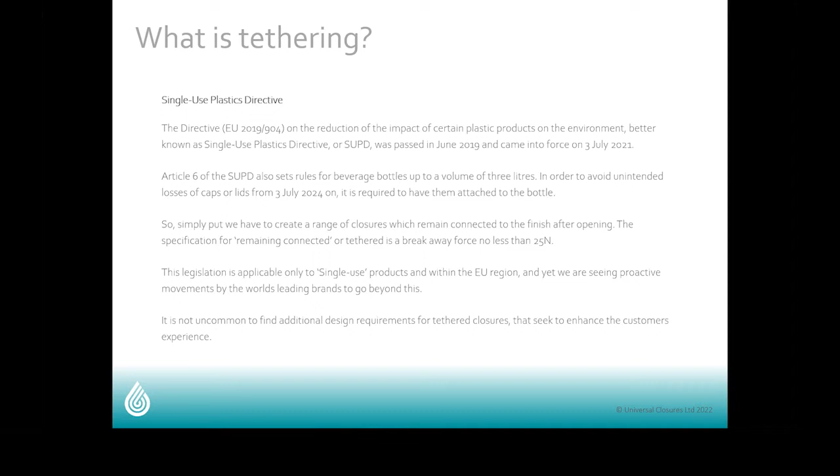I mentioned finishes then. So that's the bottle, that's the actual neck part of the bottle that the closure attaches to. You may have heard a lot of talk about 3040 or GME 3040. It's the classification of that particular finish.

Now, the standard for 28mm neck finish at the moment is 1881. That's the most common finish for CSD water, but of course there are others. It is intended that 3040 be a replacement for 1881.

There are shorter neck finishes in the market already, specifically in the form of GME 3037. But testing done at Coca-Cola showed that this particular finish struggled with some of the more extreme performance requirements, specifically carbonation retention and opening performance. So Coca-Cola set about with a group of suppliers, namely closure and finish suppliers within the industry, to create a finish which could meet the additional requirements needed.

In addition, there was a requirement to create tethered space. So GME 3040 could have indeed been made lighter still, and in fact there is a finish known as GME 3041, which is lighter than 3040, but it doesn't contain the necessary space to bring about tethering.

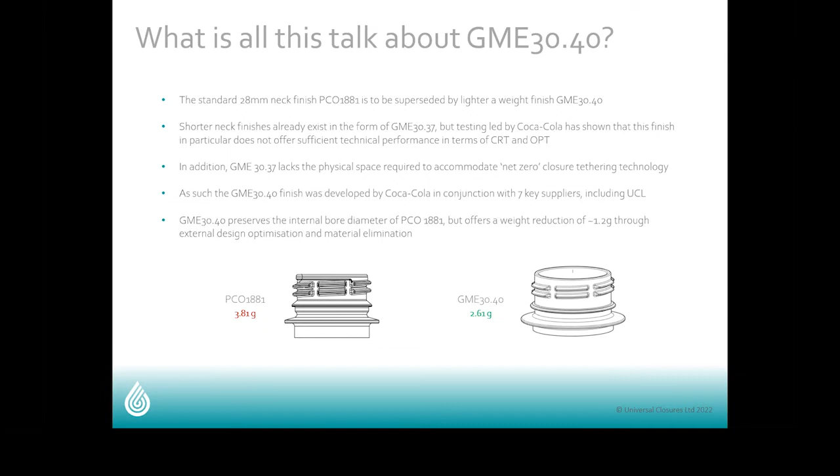So, can all closures and finishes be tethered? Well, in essence, yes, the answer is they can. The aim when tethering a closure should be to achieve a net zero impact on characteristics such as weight, capping application, manufacture, tool design, and customer interaction. So net zero, I mean, we don't want to create a situation that's worse than what we're currently in by loading up a closure with a tethering system that's got enormous weight to it.

GME 3040 is created so that there's enough vertical space to incorporate tethering technology within the parameters of the actual closure itself without going external to the actual closure geometry. There are other finishes like GME 3041 or 2925 or 3037, which don't contain sufficient height within their finish to incorporate that tethering technology. So it is possible in those situations to tether those caps by creating external geometry.

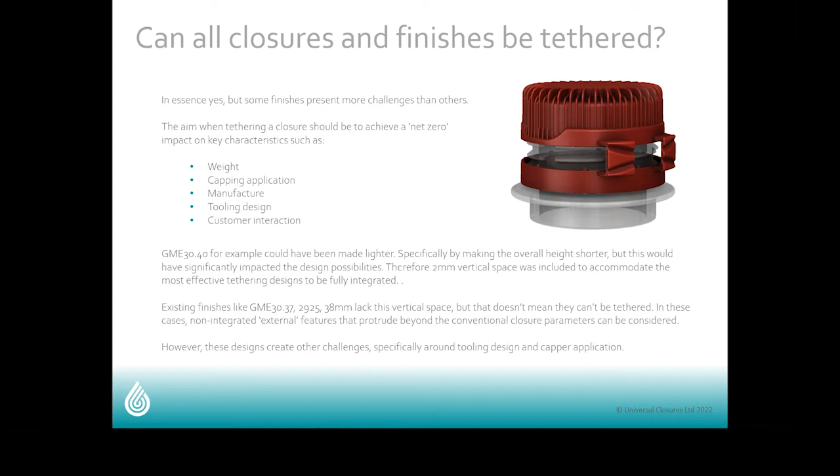And so that brings us on to a 3040 design that UCL Universal Closures have created. We have many tethering designs and solutions for many different finishes and closures at UCL. I won't go through them all today - I just want to show you two very different ones.

It was agreed by the group of consultants for Coca-Cola that 2 millimeters was the required vertical space necessary to give everybody an opportunity to incorporate robust tethering technology. Coca-Cola set additional requirements beyond the mandatory ones, covering clearance to the finish opening where the consumer drinks from, repeatable and intuitive opening, and an opening holdback—so when the closure is opened, it remains there, intuitive across many different closure manufacturers and suppliers, but remaining familiar.

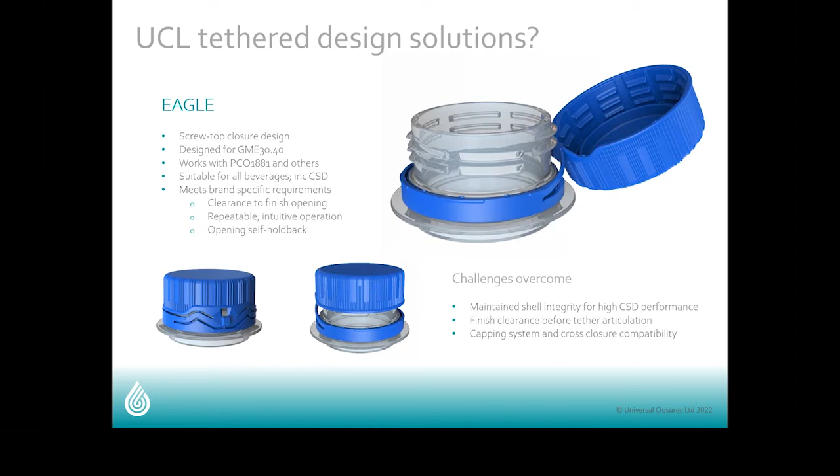A very different approach to tethering is to incorporate a live hinge within the closure. UCL have a design we call hinge molded closed, or HMC for short. This is a simple flip-top closure design. It doesn't work for CSD products because it can't vent the carbonation, but it works really well on short neck finishes like 2925, where non-carbonated beverages such as water and dairy are present. The UCL hinge provides a natural tether, connecting the lower part to the upper part. It has built-in tensions within the design that give it a natural spring effect, so once it goes over center, it comes to rest at 180 degrees or greater in its final position—there's no mechanical holdback, it just stays there.

Again, this meets the requirement of separating the finish and closure so the user can drink without intrusion. It also works really well from a tool design optimization point of view, which Michael will come on to later, because it's molded in the closed position, meaning you get maximum cavitations per tool footprint.

The main challenges we had to overcome for this particular closure—and this is a key element of what we've done—is that it works on an existing threaded finish, the existing 2925. And as I mentioned earlier, the 2925 is a very short height finish.

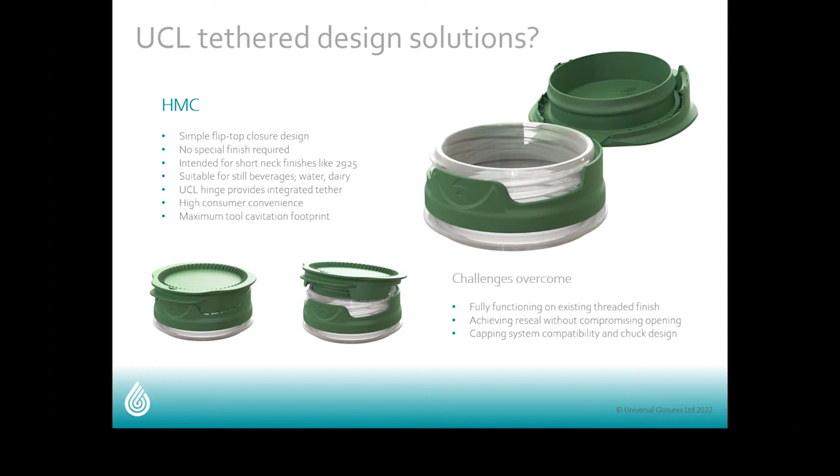And that's a nice segue, I think, into beyond tethering. Tethering is not the only tool in the toolbox for us here to tackle the ocean waste and sustainability challenge that we have within the plastics packaging industry. It has to be a much more holistic approach.

Tethering is part of a package of solutions where we can retain the closure to the bottle, which minimises the chances of those caps ending up in the ocean. They keep the package intact. But there's other things we can do.

One of those things specifically being the unification of resins within multi-component products. Universal Closures created a three-piece sports closure, which had an overcap traditionally produced in polypropylene, which we switched to high-density polyethylene. So all three components of that three-piece sports closure were produced in high-density polyethylene, rather than a mixture of PP and high-density polyethylene, which creates a problem for the recycling chain where you've got to separate those two particular resins. If we can unify the resin, that simplifies the recycling system.

We need to move away from virgin resins, so 100% brand new resin, and start to incorporate PCR resins like those from EcoPrime. UCL has done testing on various closure designs, both in water and CSD, where we have blended these recycled high-density polyethylenes with a virgin high-density polyethylene. In water closures, where the requirements are less stringent than a CSD closure, we've successfully blended 100% recycled high-density polyethylene in a closure.

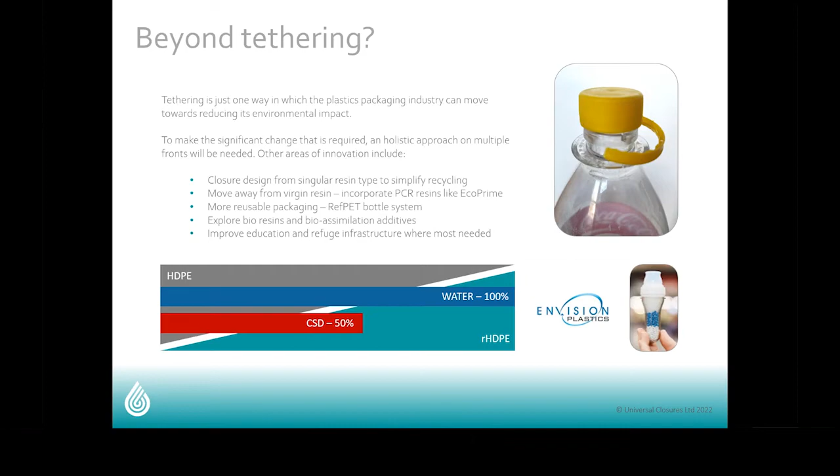Thank you very much, Mark, thank you very much indeed for that. That was great, it was really fascinating, and we're particularly interested in the development of the biodegrading additive, because I think that's going to be a big step forward. But overall, I think that was just great. Thanks very much indeed for your time. You will hang around and answer some questions later, I hope, because we've already got at least one which you'll answer later. Thank you.

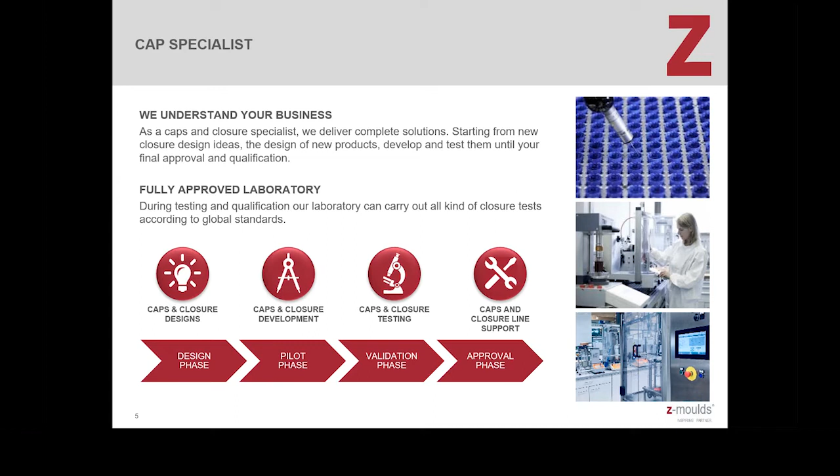We have a big equipped laboratory here where we can do all kinds of necessary testing according to whatever protocol you require. And also a capper machine, for example, to do realistic performance tests.

What we are known for is our leading technology. We have a couple of patents here. One very well-known patent is the so-called Z-slide system. And the Z-slide system is nowadays already in the market since 13 years, so well proven.

I want to talk a little bit more in detail on that because it's affecting the closure business with tethering caps as well. It's actually a good solution with a minimum changeover cost.

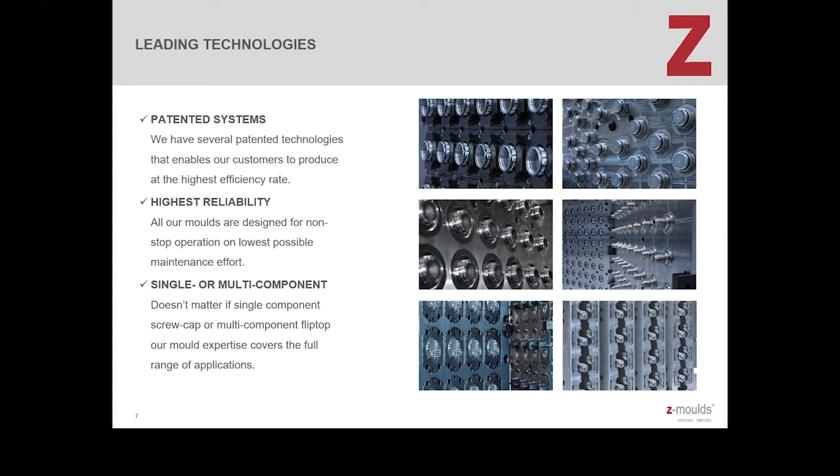So what's a smart way to do tether caps? As we just saw in Mark's presentation, Mark showed two different types of tether caps. On the one hand, we had a 26 millimeter GME 3040 design, so-called Sys. And on the other hand, the very interesting 2925, which is a hinge molded closure for an existing threaded neck. Very interesting. I will come back to both of these closures a little bit later.

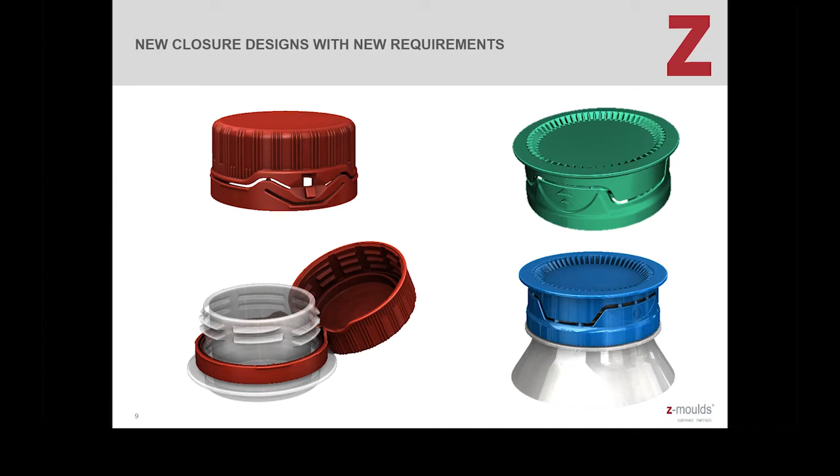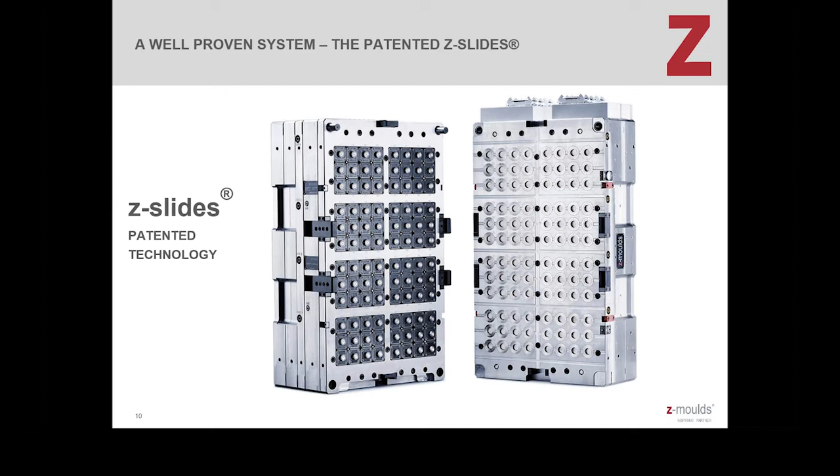Just want to start now with the molding technology behind it. As I just said, one of our most known patented systems is the Z-slides. The Z-slides is a very special system because it differentiates itself from every other technology in this area of closure producing pretty much.

So on one hand, when you look at the front of such a mold, it has a completely flat parting line. There is nothing here in the front which needs to be centered, which needs to center each cavity. That means that when the two halves close each other, it only closes on a flat parting line.

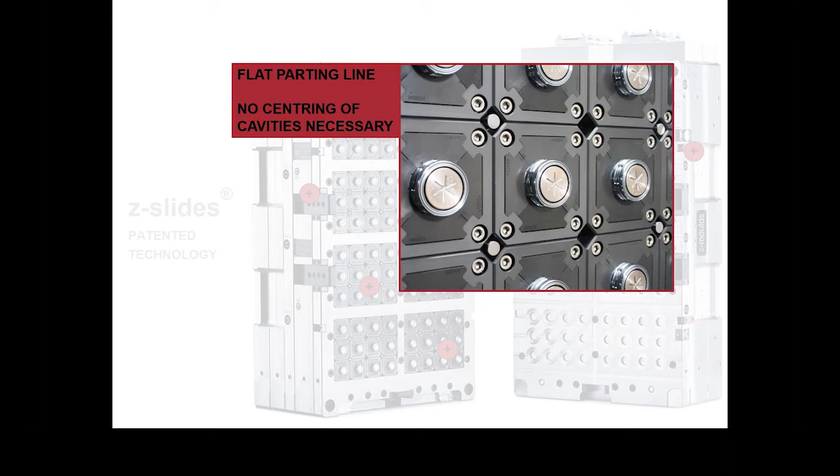And this is only because we are centering the mold with sidewards guiding bars and nothing on the cavities, as the sliders are on the inside of the mold. So the sliders are not in front of the mold and don't need any double centering. They are inside the mold and therefore don't need additional centering.

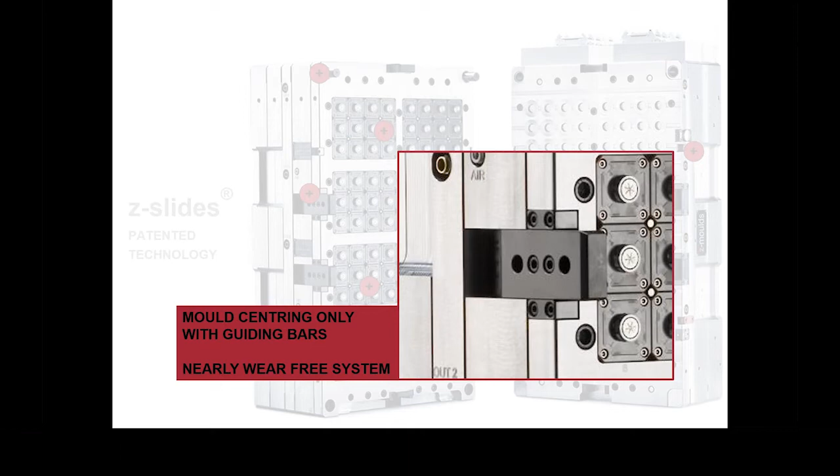Only the mold halves are centered, and therefore we have very little wear over the years compared to a regular slider system. Whoever runs a slider system knows that they need pretty much attention because of the wear created on the sliders.

Beside that, having the sliders on the inside makes the cavity also very accessible. Each cavity is accessible from the front. You see that here, by 4 screws you can pull out the complete cavity stack.

And with the complete cavity stack, you can interchange every part on the cavity, from the core to the cooling top to the stripper sleeve, the sliders, whatever. So you can do everything within the machine.

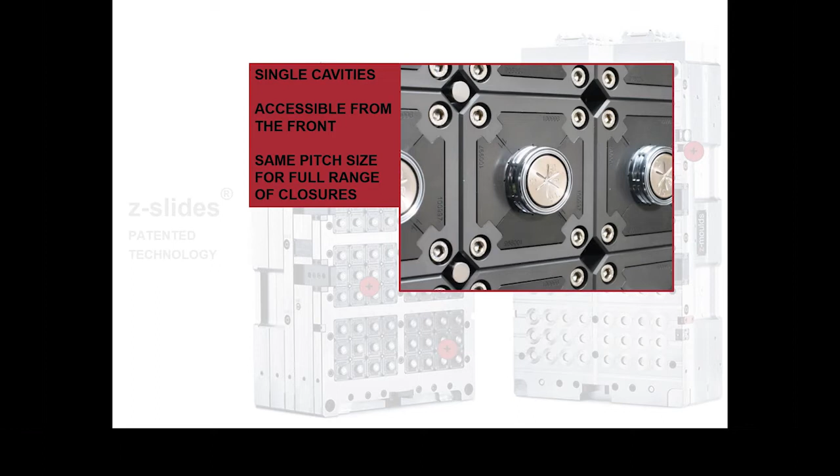And also the frame that you see here, the 70 millimeter, is the same frame for all kinds of closures, from 30-25, 29-25, down to 28 or 26 or 25 millimeter nowadays. So for all your molds, you remain with the same size of the mold, therefore the same pitch between the cavities, therefore the same hot runners.

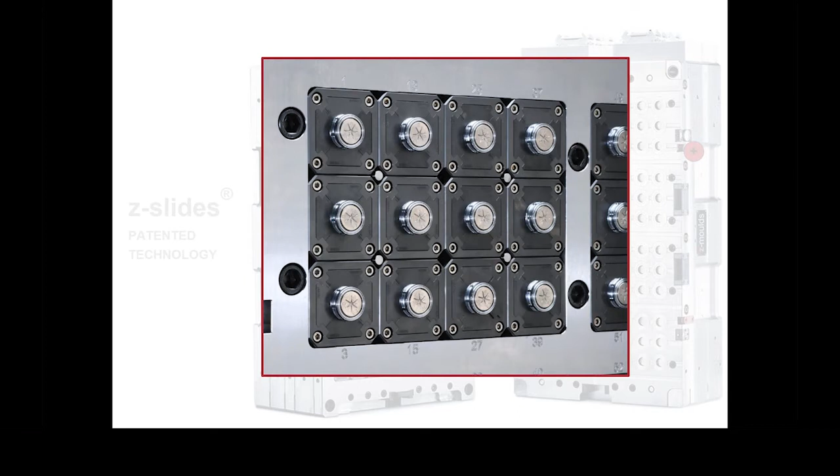So that was just a quick one on the Z-slides, just to recap. As you can see, the sliders are moving out, and then after ejecting the closure, they are moving back in. So that's the simple movement.

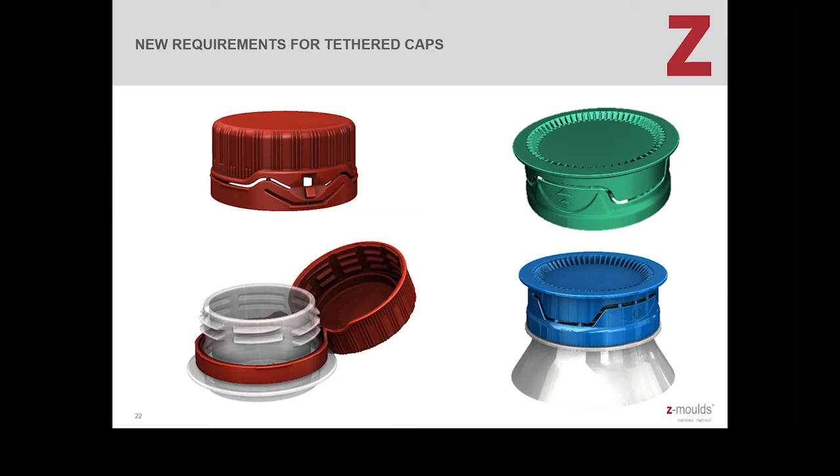So now, what has that to do with tether caps? For sure, new requirements come up with tether caps. As we already saw with Mark's explanation on the design, we have on the one hand a 30-40 design

with a hinge here that can give the closure the necessary height in releasing the cap from the thread, or even in this 29-25 millimeter design that has an active hinge. We need to demold lots of different shapes on the side, and that brings in the classical slider molds.

In our case, it will mean that the usual parting line, which we have from the cold half to the hot half, with the sliders on this side, the parting line will move upwards. On this design, for example, the parting line is here, and on the 29-25 design, the parting line is at the top of the closure. So the complete closure contour, the complete side walls are within the sliders.

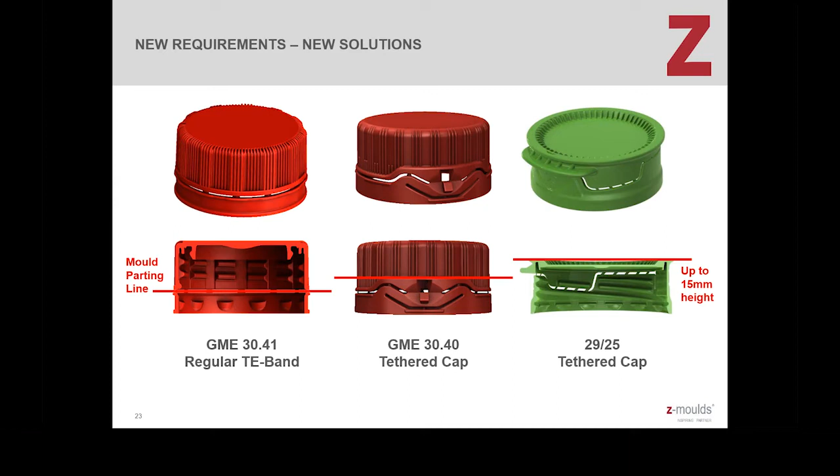And that means you need higher sliders to give it the space to demold these kind of designs. And what we did is we used our existing and well-proven system, and by changing angles on the demolding phase, we could simply increase the height up to a 15 millimeter space, which we can demold a closure.

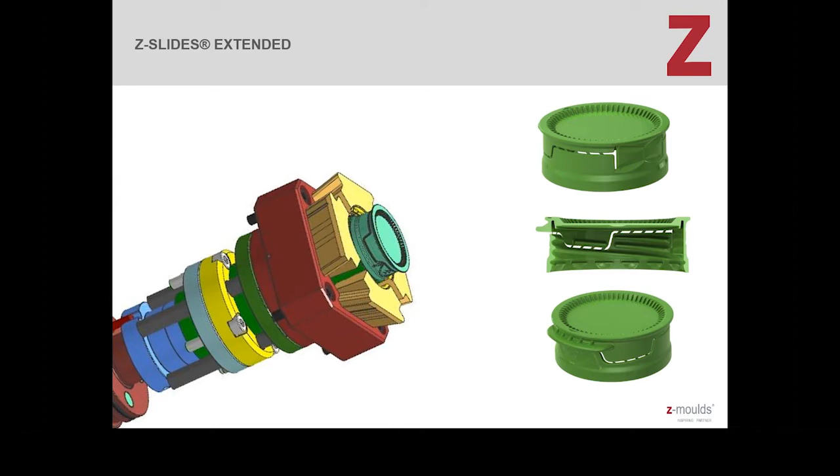So therefore we can bring, for example, a closure like this here completely on the cold half side. That means we remain with the same existing advantages of having less wear, having the same kind of pitch between the cavities and everything.

So that means we can bring up a very flexible system, which you even can rebuild from an existing Z-slides mold to one of the new tethered designs by simply shifting the parting line and extending the sliders. That means you have one mold size with one kind of cavity stack, compatible from a 25 millimeter closure up to a 33 millimeter closure, and in the height possible up to 15 millimeter of cap height to be completely covered in the slider.

And this means that we can cover a right compatibility on all known closure necks like 1881, 1810, 29, 25, 30, 25, and all the 26 millimeters and 25 millimeters.

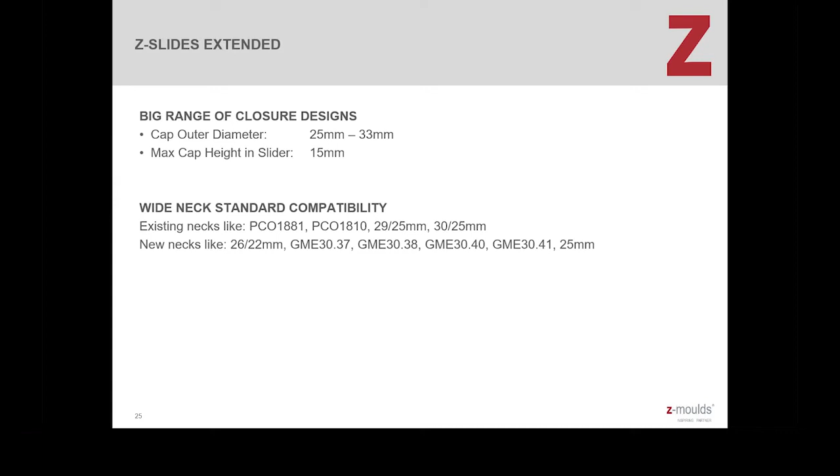What brings that at the end of the day? We can still remain with our established system, with all the big advantages that were proven in the last 12 years. We can have the same wide range of closures covered in the same size of mold with the same hot runners and everything.

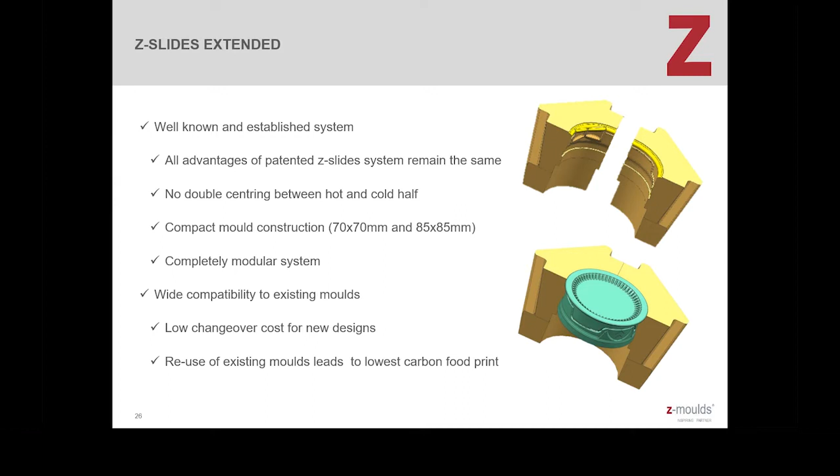And not just with the extended slider mold. It's the same. It's also, if you, for example, nowadays have a closure with a folded band, where we use our Z-folded technology, or if you have a regular closure with the Z-slides technology, with a regular molded TE band, where we use the Z-slides, or nowadays with the Z-slides extended version for the tethered closures.

All these different technologies are completely compatible to each other. That means they have always the same pitch between the cavities, so you can use always the same hot runners. Most of the base plates are the same. You have the same accessories, you have the same cooling system, and mostly the same standard parts.

So this also is an important point that Mark covered in his speech, that sustainability also should bring us to a point where we can reuse things also on a mold side, and not heavily invest in changing lines and adding weight and so on. So it's better to use the existing and by simple changes be able to cover also the new requirements.

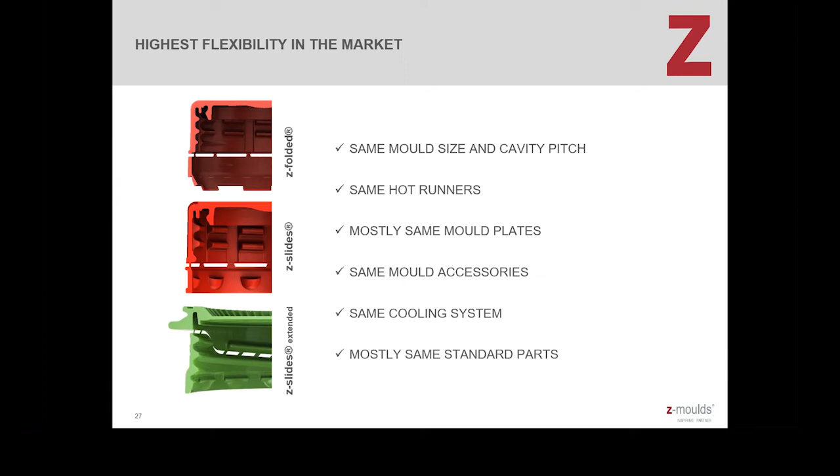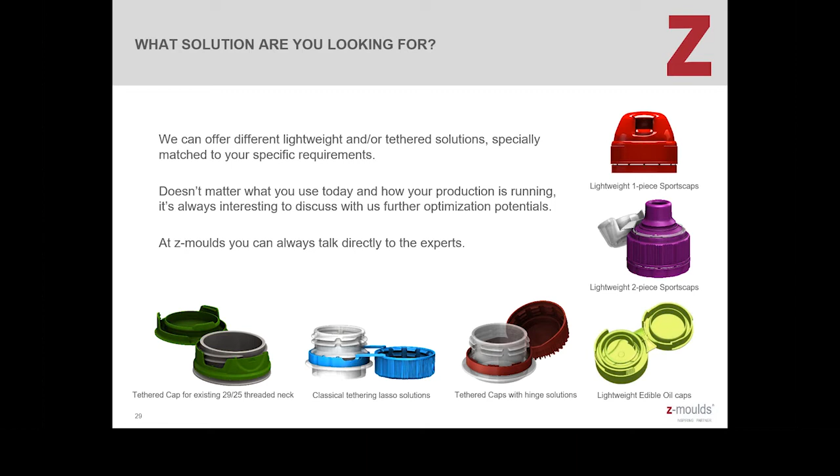Anything else? Yeah, if you need anything else, then beside the tether cap, also if you're looking for sports closures or edible oil or whatever, just come back to me and I can show you various different designs and solutions for all these closures. Thank you, and from my side, back to Ruari.

Thank you, Michael. Thanks for that insight into tool making, because I think we're all aware that there are challenges with making the new tethered caps. It's good to know that it's not frightening and not overwhelming, that there are people who are there to help us cope.

Right, the third presentation today is from Sascha Baumanns, who's from Intravis Vision Systems. Sascha joined the company in 2005, so he's been with them for 17 years now. Makes him something of a veteran, I think. He works in the international sales department and is an expert for vision inspection technology for the injection moulding branch, especially in Europe, Asia, and Australia. He's focused and specialized on the injection moulding industries and their products, and was deeply involved in the Drinktec 2017 closed loop closure production project. And since 2019, he has been leading the sales team.

Now, Sascha, have you got your camera switched on? Because I can't see you at the moment. Yes, it's on, Ruari. Thank you. Is it? Yep. Okay. All right. I was looking at the wrong one. It was IW rather than SP. There you are. There's your presentation. I'm delighted to hand over to you.

Thanks very much. Thank you very much, Ruari. Thank you very much for the nice introduction. So my topic today is tethered caps need new inspection solutions. I see now in the chat a lot of my colleagues, former colleagues, but also some of my OEM partners and my customers. I see them from Australia, I see them in the US, and of course here in Europe. So good morning, good afternoon, good evening. For those of you who don't know me, my name is Sascha Baumanns.

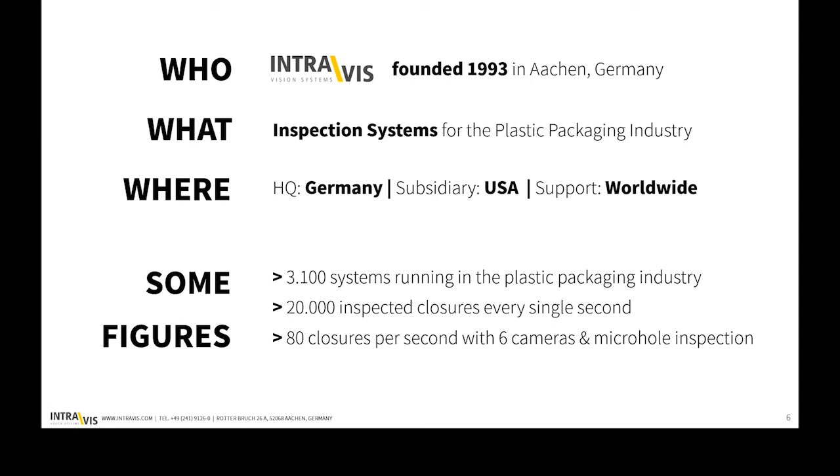We heard a lot from Mark and Michael about why tethered caps, so I won't tell you again about the past or the future. Just one focus from us: we're concentrating on both reducing littering and increasing recycle rates for plastic closures in Europe.

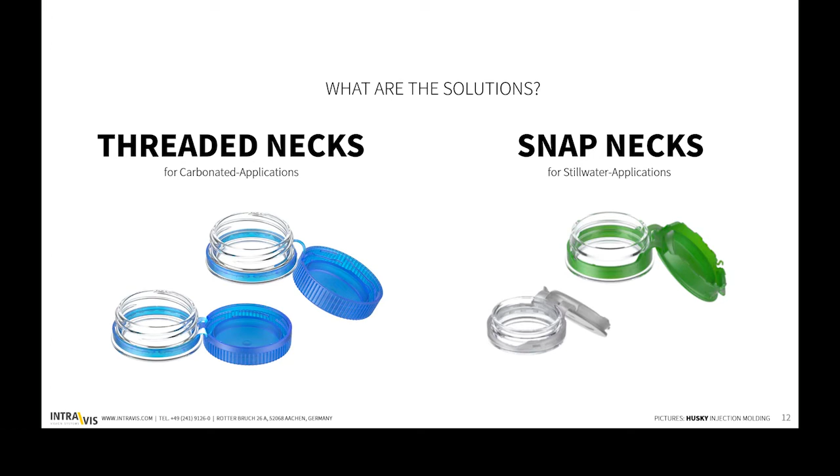So what are the solutions? You heard from Mark that you've got a threaded neck and a snap neck, for still water applications or for carbonated applications. What are the solutions in the market? Of course, folded, as we heard before from Michael, but there are also slitted versions available in the market. Our focus will be to have a vision inspection system ready for both slitted and folded tethered caps.

As we've seen today, there are already a lot of different exciting and promising design concepts on the market. Some with a clear focus on compatibility with existing production equipment, others with high added value in terms of user experience. Many of these features are quite new in the beverage closure sector, especially for us. So the vision inspection system needs artificial intelligence to focus especially on the tethered caps feature.

So we can help. We've got something to ensure that this challenge does not become a risk. We have taken a look at the entire value chain and we can help optimize and minimize your risk. What is our solution for this?

We start in the beginning with the CapWatcher Q line. Later on, I want to present a smart camera called the Intra1. Then later, I'll show you some solutions for the filling and capping line.

So we're starting now with the CapWatcher Q-line system. Q means quality lab - we bring the quality lab inline to your production. Whether inline with an injection molding machine or a compression machine, the CapWatcher Q-line inspects 100% of the produced closures. The system is equipped with 6 cameras, an innovative microhole inspection, and our unique temperature inspection. The temperature measurement of each closure in combination with our reliable cavity number reading offers unprecedented possibility in monitoring the mold.

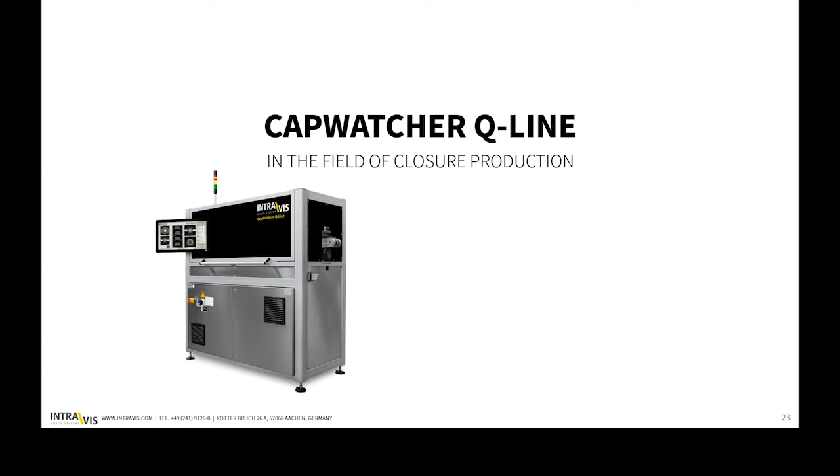Here we see our movie regarding the Intravis CapWatcher Q-line.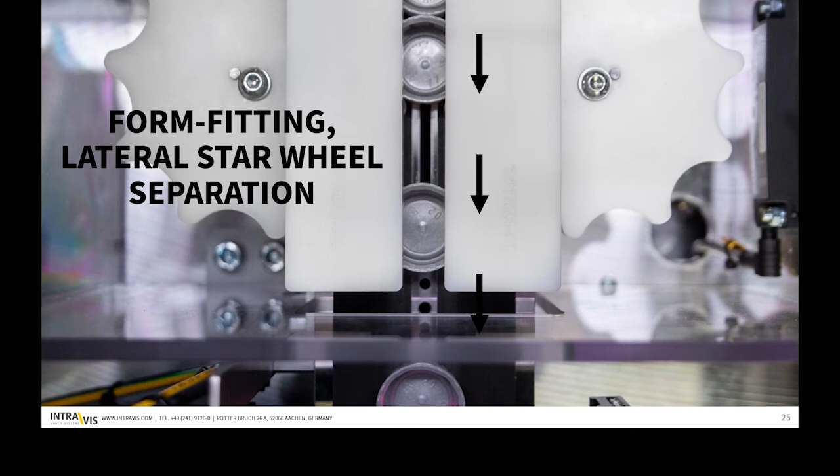What we can do here, for example, is measurement of the closures with an accuracy of 0.02 of a mil. In comparison to our competitors, who are just doing a comparison measurement, we are doing real measurements. This is a key fact for Industry 4.0 realization.

Furthermore, we've got the non-contact microhole inspection. Why do we need this? It's a highlight of our systems that we can inspect using microhole inspection where the closures are not in a jam. Here they are singularized, which gives a big advantage that we can also read the cavity number, and we are putting all the defects in respect to the cavity number, sorting out just the defect closure, not the 3 or 5 before or after.

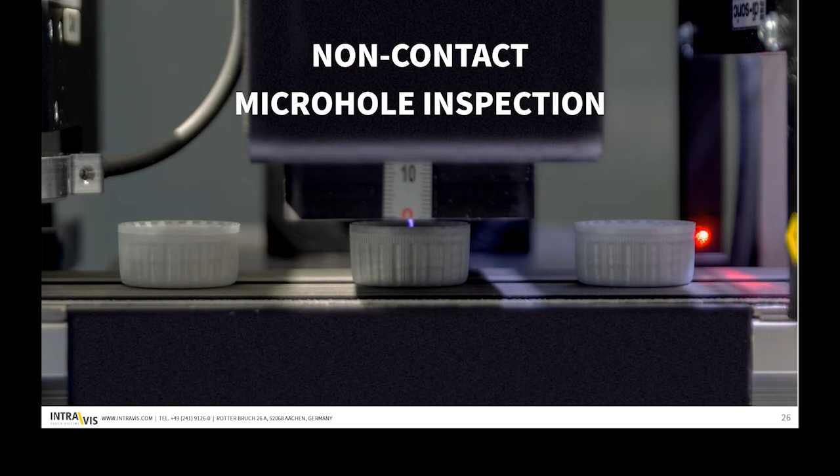Why is this so important? It's because these micro holes can lead to inconvenience for the end consumer, since a bottle becomes leaky or foreign substances enter the bottle. Whereas conventional microhole inspections still use metal wheels to dip into the closure, making it impossible to inspect closures with useful features inside, such as reclosing features, in the non-contact variant the closure slides under the inspection unit without the need for immersion or any contact. This is not only a great advantage in terms of process stability, it's also a hygiene factor.

Then we are using 3 cameras for the inside inspection. A large focus is placed on the important functional elements of the closure, starting with the sealing surface, the seal cone. We measure, for example, diameter and ovality. The closure head, the thread area, the area between the closure and the tamper evident band, as well as the tamper evident band itself, and all elements such as hinges or locking aids. In addition, the closure is inspected for cosmetic features like black dots, unmelts, burns, and the cavity number is read so that each inspection criteria can be assigned to the correct cavity number in the mold.

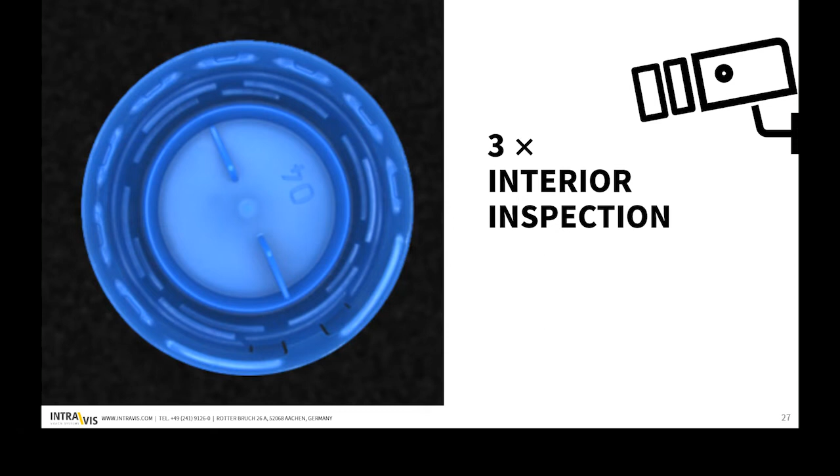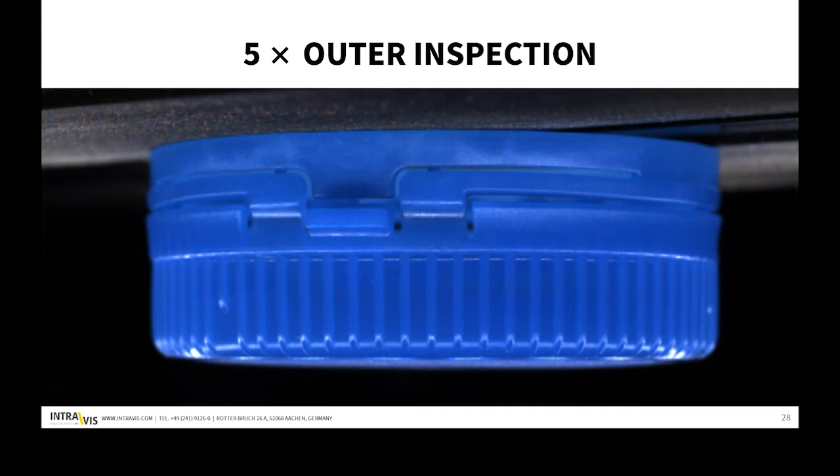Furthermore, we've got outer inspection. You see here the closure is hanging on a vacuum belt. With 4 cameras, we are inspecting 360 degrees of circumference, plus we have 1 camera from underneath, from the bottom, so we can also inspect the outer head plate. This is very important if you have an opaque closure where you cannot look through. Even more, we can also inspect for short shots, flashes, or worn blades, which can be identified at a very early stage.

Here you see the HMI of the system. It will directly display all of your products at one look. This is a closure where we have the inside inspection, the cavity number reading, and we've got the temperature sensor.

Why are we using this? There are 3 advantages. First, you can do a closed loop regulation, because you need to know the measurement - is this done on a cold or a warm closure? The second advantage is you can define the shrinkage in the mold, knowing directly that a cold, crystallized closure has maybe a final diameter of 28 millimeters, but together with the warm material, master batch, and virgin material, I have to make it maybe 1/10 of a mil hotter with more diameter because of the shrinkage. The third point is, if you have a blockage in the cooling, the system will directly see it, because then one cavity bench is too hot, and this could be shown by the system.

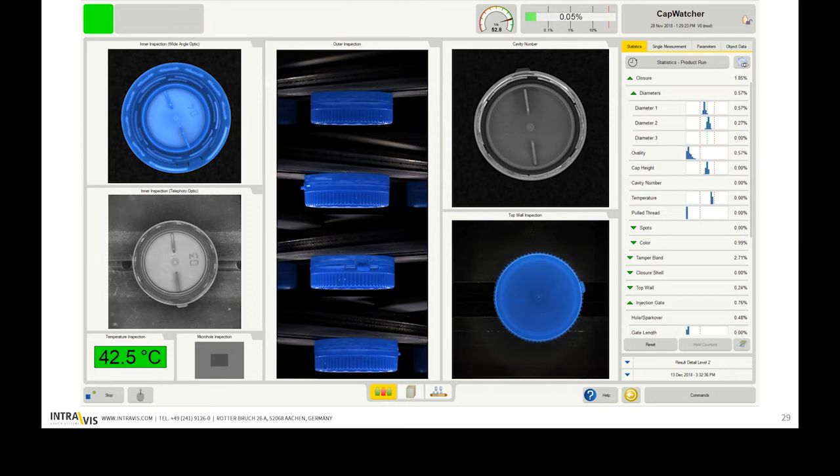4 cameras from the side, plus 1 camera for inside where we do the real exact measurement of seal cone and diameter, and the outer head plate inspection, together with microhole inspection, giving 144,000 cavity-related statistics. Here you see the statistics on board, or if you have an intravisualizer, you can also see it in your office, the quality department, or wherever you are.

So this was the first solution, the Intravis CapWatcher Q-Line. And now we also have the IntraOne camera for integration in the feeder for the capper.

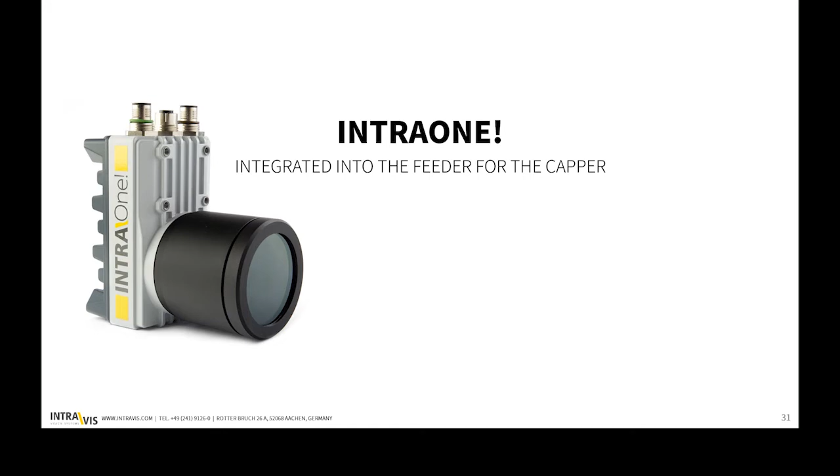The system looks like this. It has proven itself for several years in the inspection of closures in the feeding of cappers before the filling process. Whether as a standalone application or integrated into a sorter, the IntraOne ensures a smooth filling process and minimizes the risk of cost-intensive machine downtimes. Here you see an application, and with a dedicated inspection setup, the system inspects the closures for deformation, color, and dimensions - all 3 points which will stop the filling line.

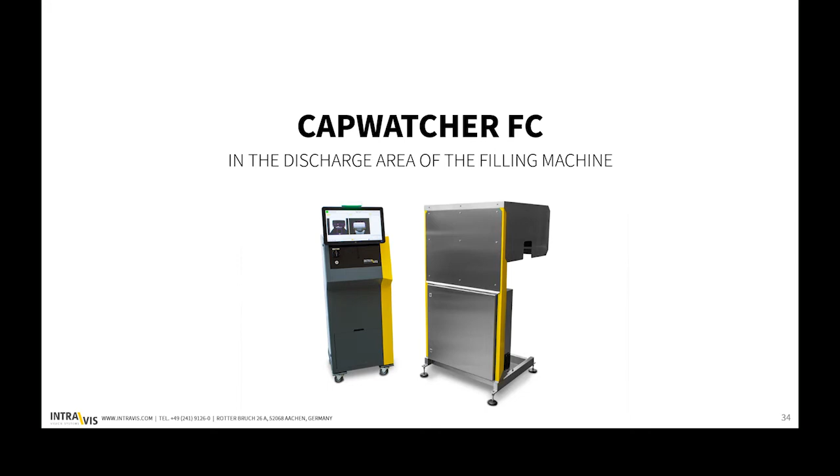The third solution we have is our CapWatcher FC for filling and capping, where we are in the discharge area of the filling machine. Its area of application is the inspection of bottles and caps in the outfeed area of the filler after the filling process. It's equipped with 7 cameras and inspects the filled bottles for proper closure fit and important tethered cap features such as hinges and bridges.

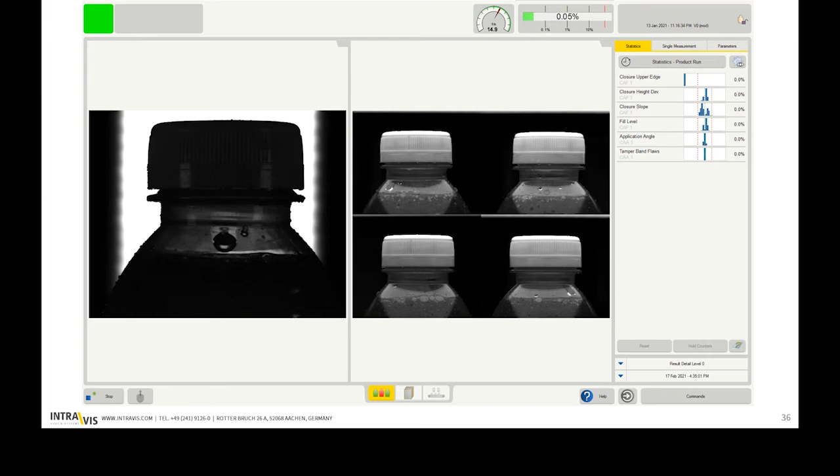Here again, you see the HMI of the system. Very important here is also that we are looking for the application angle, the color, and the gap between the cap's tamper evident band and the bottle's neck support wing.

And of course the correct fill level of the filled product. In addition, all inspections are in accordance with CETI quality guideline number 18. That means the CapWatcher Q-Line measures the caps with a repeatability of 0.02 of a mil and can reliably determine the weight of the caps in parallel sampling operations. And with the CapWatcher FC, it monitors the gap between the TE band and the neck support wing, as well as checking the correct application angle.

So you see, with this, it fits directly and wonderfully into our solution portfolio of high-performance inspection systems for the plastic packaging industry. Here you see our caps and preform production. That means here we offer the CapWatcher Q-Line, the CapWatcher SC, and the PreMon, a monitoring system for preforms. We also have systems for resorting and refining.

This could be a PrintWatcher for print on-site on a closure, or it could be the IntraONE. The IntraONE could be used for all applications in the packaging industry. The PreWatcher is an online and offline system for resorting with a speed up to 72,000 preforms per hour.

A Sample-PreWatcher is a laboratory system which directly inspects all the attributes on your preform. It could be, for example, dimensions on the thread—E, Q, H, X, and so on. It could be weighing the preform, or measuring flash on the parting line with an accuracy of 0.05 millimeter.

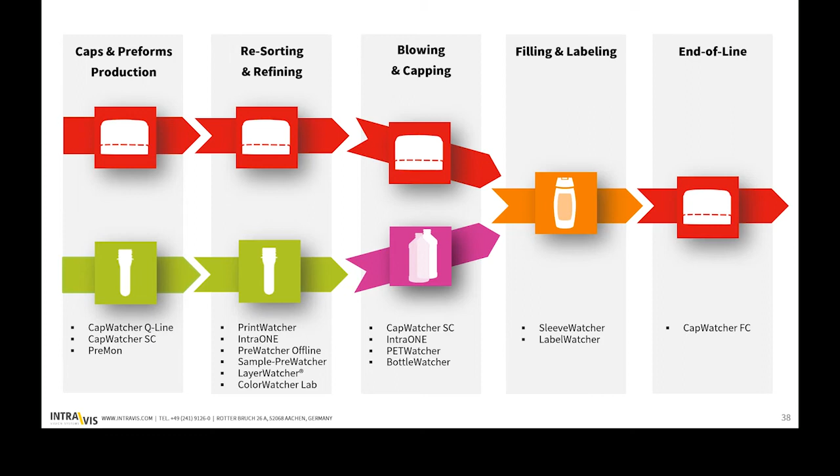So this is the end of my presentation. Thank you very much for your time.

I see now with all the people that nobody left, so I think it was not so bad. Thank you very much. Thanks, Sascha. That was great. As far as I could see, nobody left who didn't immediately come back.

So that's good news. We'll be taking questions in a moment, but before we go, I think it's really an excellent thing that you've done there. You pointed out, or somebody said to me a little while ago, that the most expensive way of quality control is for your customers to tell you that something's wrong. So it's an awful lot better to invest in quality control within your plant before it becomes a problem outside of the plant. Thank you very much indeed for that.

And also, the more you can automate, the easier it is to do, and the more you can compete with low-cost labor areas elsewhere.